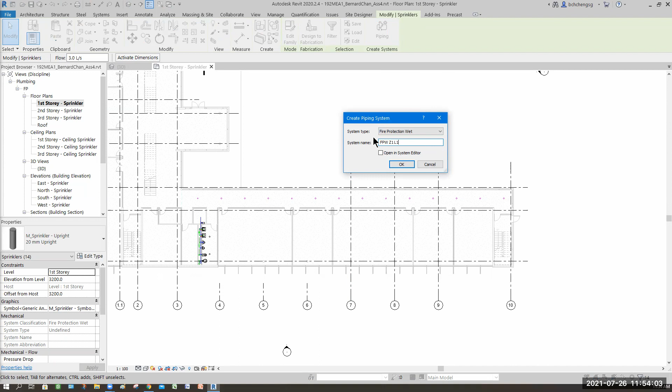So pick OK. Then generate layout. So place base. If you place your base here, to me, I would say that is blocking this. So I would like to place somewhere closer here.

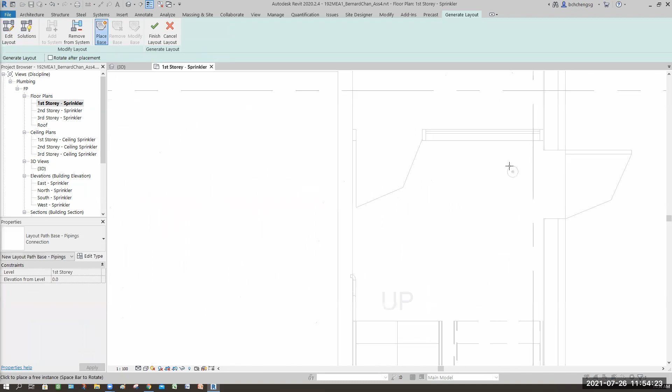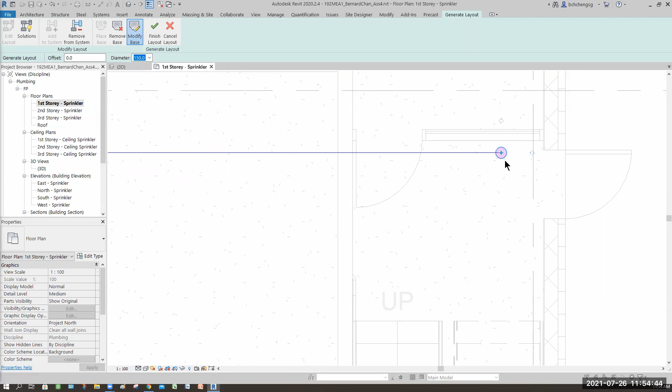All right. But again, all this can be adjusted, so no worry. So check again the drop. Remember, okay. If you, I think should be okay, because just now we see that the same.

So same thing. This one's supplied for 3 levels. So this one's okay. After that, go to solution. All right. Set the height. Make sure it's 2.9. So this is correct. Network.

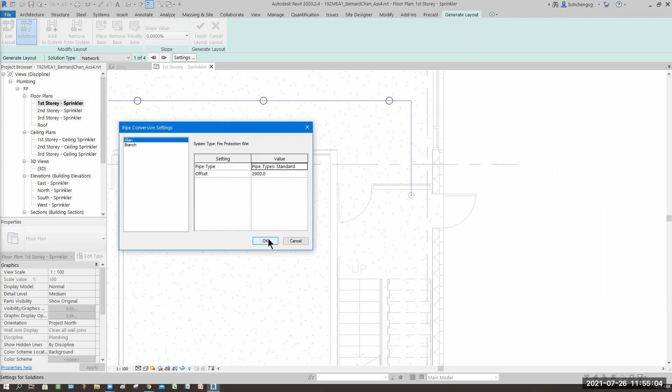You see, it give me this. This pipe should be somewhere here. Then you branch out.

All right. Because why? You have something to share here. So it's ideally in the center, in between the room, not just underneath. Okay. So unless you tell me you have 2 separate, then depends on the control.

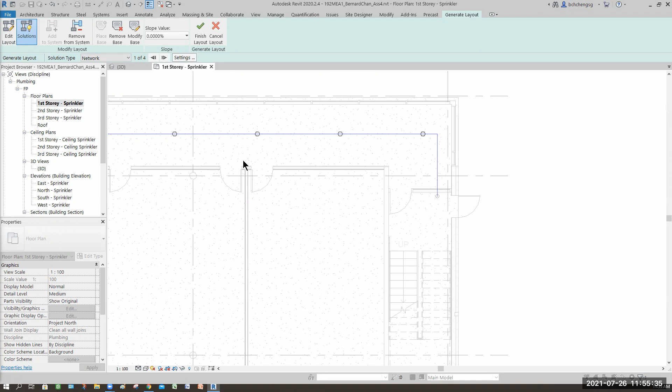All right. If not, then it should be. Let's see any other solutions.

This is nice. I like this. See, they auto connect. That's what I want. But it's inside this room. I don't want. So how?

But I like this. Remember the edit layout? Select edit layout. Then you select this pipe. You move it.

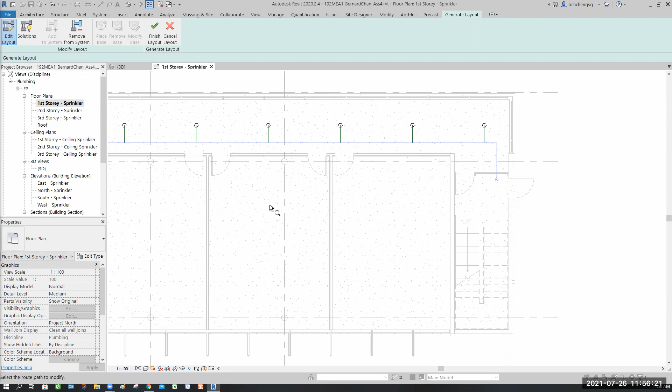Cool, I love this. Ooh, this is nice. Like that. So you see, they auto do the adjustment. So you see, this is a lot more faster, quicker. This one, oh my God.

Terrible. Can I move this or not? Make sure it's connected, not so bad. So finish.

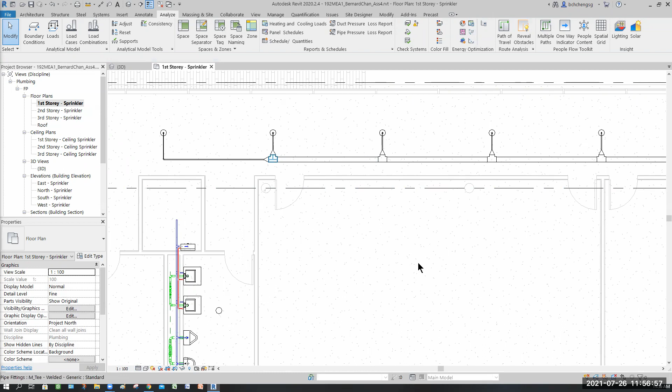But you'll be scared in this way that when I say scared means what? The pipe size looks terrible. Yeah. Set the fine finishes, I mean the fine detail. Look at the piping. Oh my God, this is too big a pipe.

Okay. So same, come out. Let's say, hopefully it won't clash onto the system. See, it's very close. Look at it.

So you have to have what we call a section view to see or to adjust the pipe. If not, think of a way to adjust it.

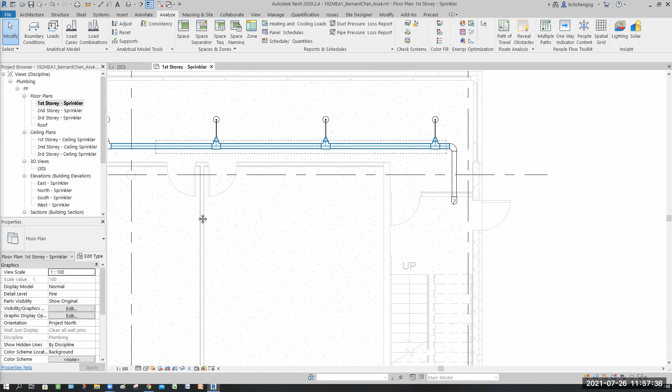Okay, but definitely this one you can maintain, but all those components here, all right, this one here, all this you got to change. Control key.

You can see I only select up to that reducer, not the rest, yeah, because oops, nearly make a mistake. Selection very sensitive when they detect.

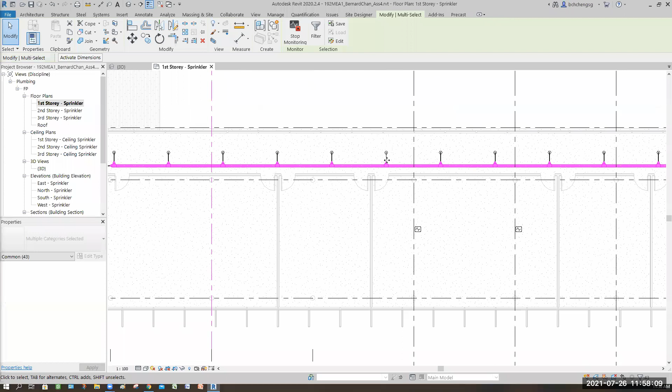Okay, so this pipe itself, if you are modifying, did I select any other thing? No, multiple selection. Oh, grid. No wonder.

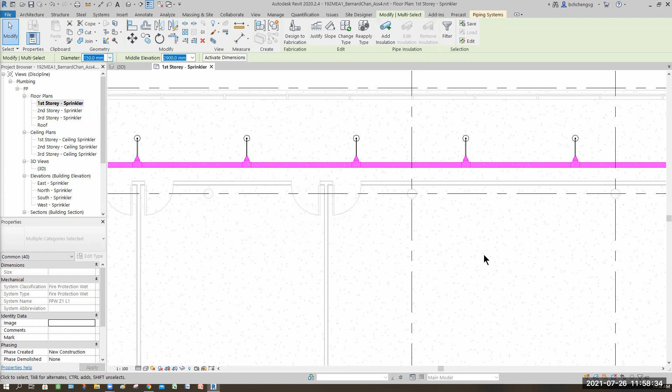Uncheck the grid. You only want your pipe fitting and pipes. Apply. Okay. Then you can specify. So here, you may want to say, okay, here up to here maybe is 100.

Then later down the road, you change. Or unless all the way is 100. But as I said, you can use the split tools to split it. All right, then you change a pipe, they will change again. So meantime, I choose 100.

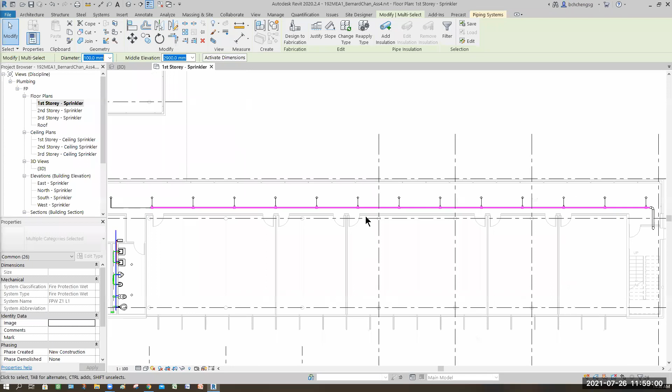It should be changed. All right, then in between, maybe from here onward, let's say, I will split it. Modify, split one of them here. Okay, in between.

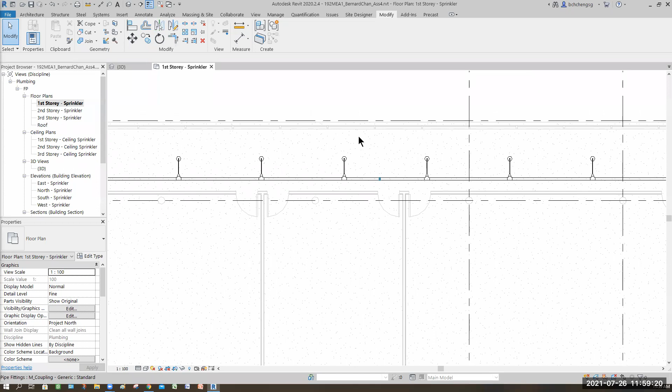So, oops. How come got two? Coupling. Oh, they're smart, when you split, they give you a coupling.

Okay, so I'll still want to select up to here. Careful, yeah. Always remember, use window selection, not crossing. Crossing, you can see that the rest will be affected.

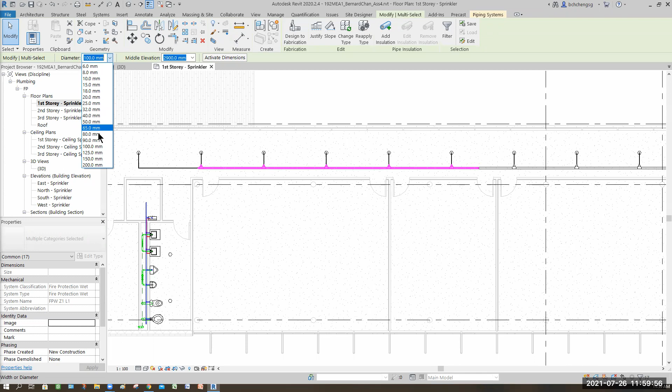So here, I'll set this to 80. Yep. Or maybe 65 if you want. I think 80 should be, 65 should be good. Yeah, so here should change, right?

Ooh, it doesn't, how come here they give me coupling? That's weird. Let's try to connect and see what they see. Ah, this is good. Okay, so done.

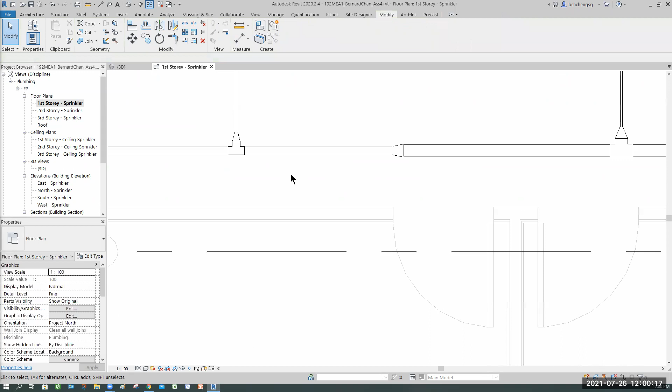Now the last part here. All right, so remember not the sprinkler. Whole thing here, 32. All right.

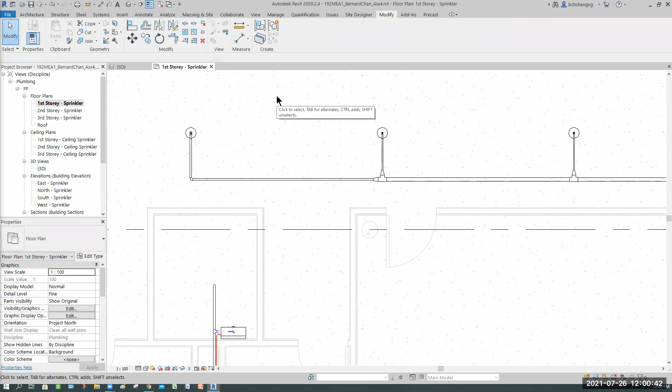Okay. So of course, all these things you can choose everything, which is window, remove the sprinkler, piping is 32. See, one shot you make the changes at one go.

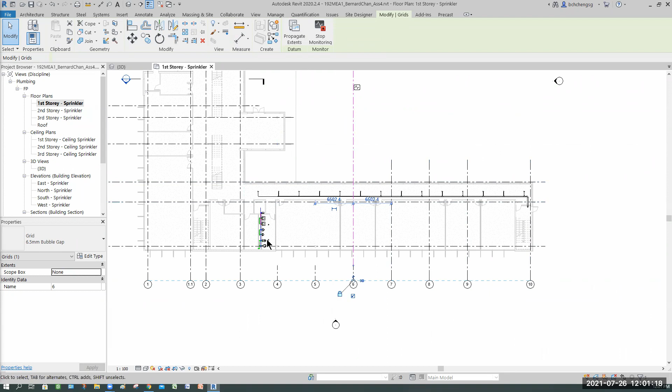Okay, so if you look in the 3D view, this one should be okay. Then because here is all the way same, you just connect this to this 32 straight away. Because you need supply 2, so how? Pick this, connect into here.

Okay, so window, remove the sprinkler, then 32. Everything should be nice. Yeah, good. Done already. The toilet.

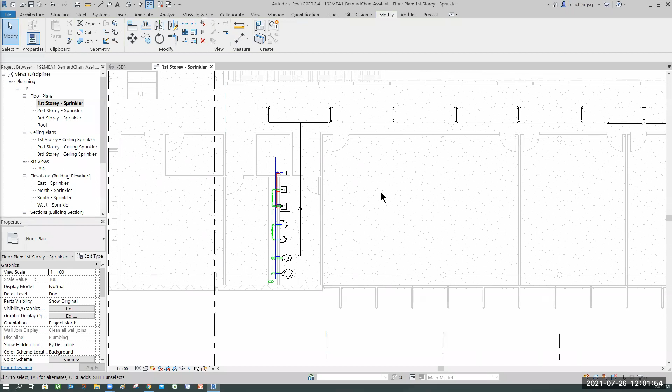Questions? So here, you guys think about it.

See how you draw. So remember the piping here. Got to extend back to other level.

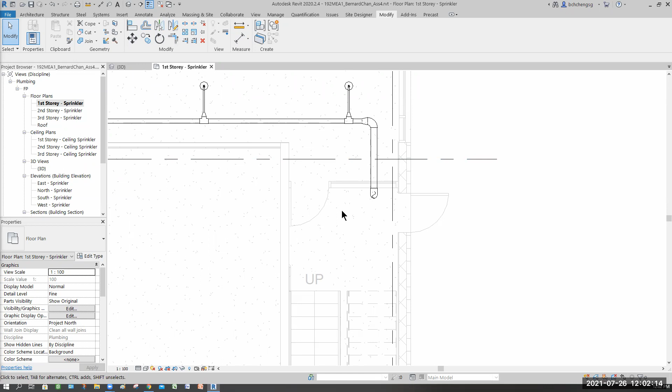Okay. Questions? No, sir. Yes, Santos. Okay, no, but here is okay, sir, always the headache part, because of the exit.

So remember, every floor, this guy, there's a concrete block here. You know what's a concrete block for, right? Around, what I see is around not 50 mm high, it's around 100 mm thickness. Surrounding is like 150.

Yeah, is to prevent, I think, seepage, right? I believe, or something like a mounting. Every floor should have a block. What's that? What's that for? Anyone knows?

Which one is it? Because normally when water comes, for a start, because of pressure, there will be a vibration. This is my logic. If wrong, please tell me.

Every floor there's a block here. Someone told me it's to prevent water seeping inside. To me, when you cut a hole, you seal it. The block is also, I feel, more to prevent water seeping in. That's one thing. Also acts as a holding ground for it, so at least it's firmer. I think that way.

Is it that way normally, or some other stuff? Because M&E, I believe you will have a session where your lecturer will bring you to the breeching outlet or to the fire command center. Will show you all this mounting, right? Some you got to breeching inlet to pump in so it can supply to the rest. I think BCA there, the breeching inlet outlet is at the command center, right? Opposite only, yeah, at the FCC there.

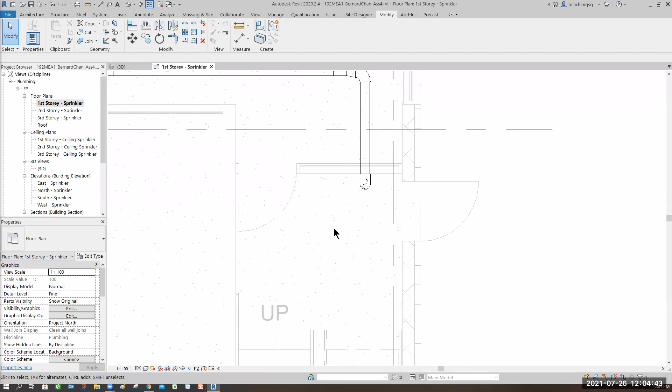Okay, so remember here, I don't know whether we need the fire hose or not. If yes, you can put it here. Because fire hose can be nicely created, like I said, there's stainless steel. You can present it nicely, not a kind of wooden casing.

So it depends on places, special design requests and so on. Feel free to probably go 313 Somerset. Yeah, need, because they need to cover the whole building. So that means you're correct.

So you must have another water pipe coming from here, at this corner. If coming from here, you cut through your glass. I don't think they want it that way. So you can have a piping coming in here.

You see the tutorial one, they put it inside here. Somewhere, let's say you're doing second story, they put somewhere here, then the hose just opens and comes up this way. I find it a bit weird, but to me, as long as the design is nicely laid, I would say it's alright.

Agree? Like stainless steel casing, presentable, look nice, right? Not that kind of wooden old painted one. The stainless steel is not in red, it's really chrome finish. If you didn't look properly, you wouldn't know it's actually a fire hose.

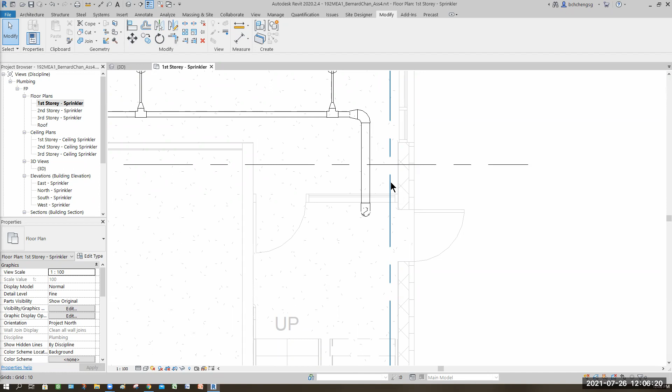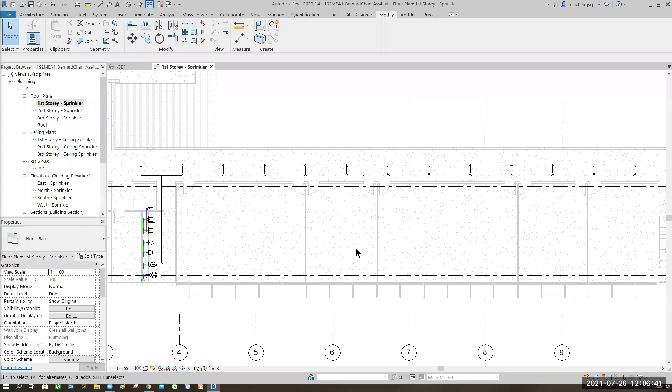So for some of you guys, if you have a room that is here, then of course you do the rest of the linking. But because this is first story, yours is on second story, right? So this is still the same supply throughout. You can copy and paste to second floor or third floor, depends which level you do it. Then make sure all these piping branch out and connect properly. Questions? No.

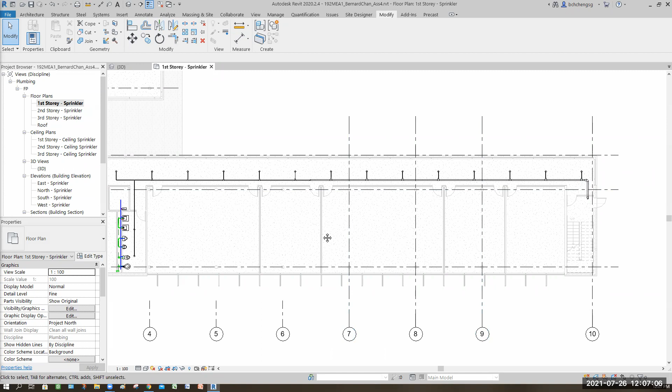So first story, this is what I have. Second floor, this is what I have. So after we connect all the pipes for the sprinkler, we have to turn back on the HVAC and all this to check whether there's clashes.

So you must think of a way how you want to get it connected. The thing here is if you do it this way, as I mentioned, you go in this way, it clashes. Then you must think you go in this way, then go straight here, then out. Try not to hack anything on the wall, it's not nice, it's difficult also, you can see.

And because here also glass, so you got to go in and turn off. So must always think of a place to save money. Try not to hack wall too much unless you got no choice.

Because when you hack wall, you need to know that at the height, is there a beam? If there's a beam, it's your fault, because you never requested to cast a hole so your pipe can go in. So if you need to hack, they will not hack, they will ask you to go around in a U shape.